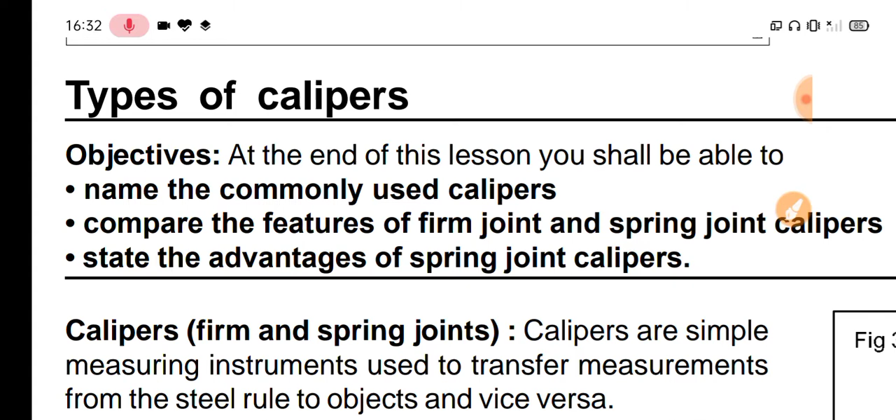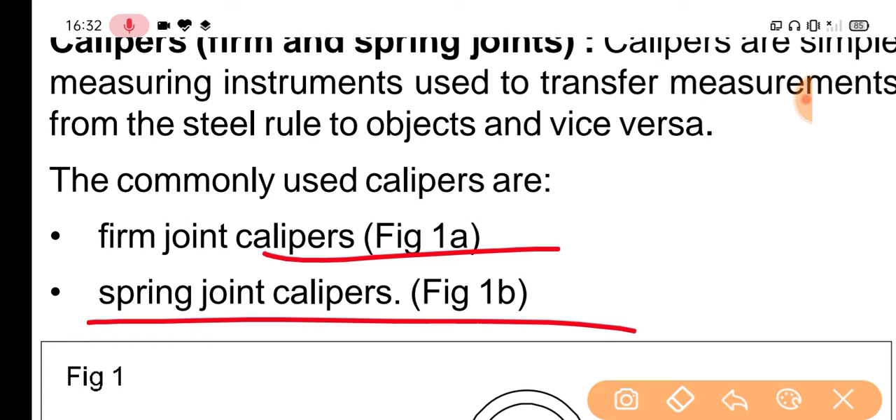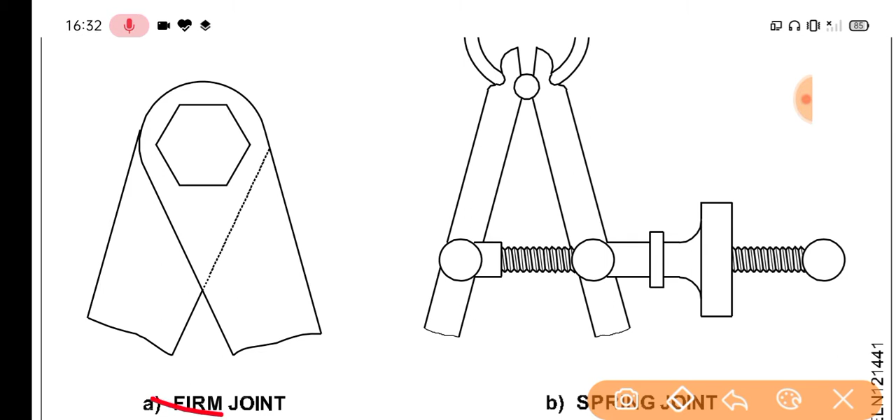Calipers, firm and spring joint. Calipers are a simple measuring instrument used to transfer measurement from the steel rule to object and vice versa. The commonly used calipers are firm joint calipers, shown in picture 1a, and spring joint calipers, shown in picture 1b. Picture 1a is a firm joint, and picture b is a spring joint.

Firm joint caliper: in the case of firm joint calipers, both legs are pivoted on one end to take measurement of the workpiece. It is opened roughly to the size, so fine setting is done by lightly tapping it on a wooden surface. Pictures 2 and 3.

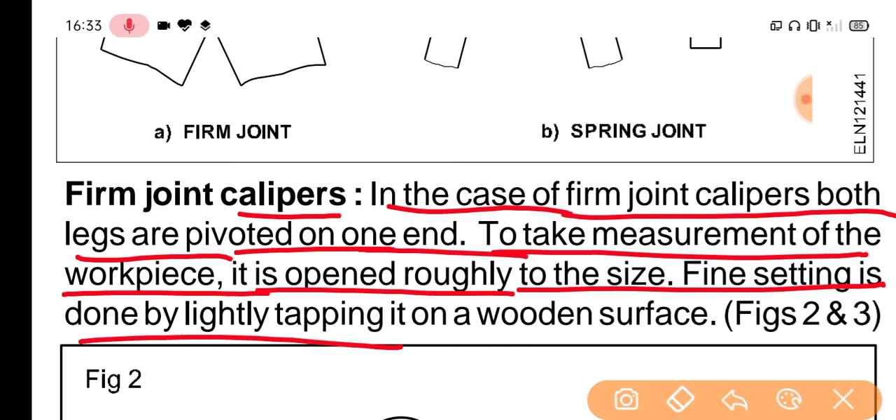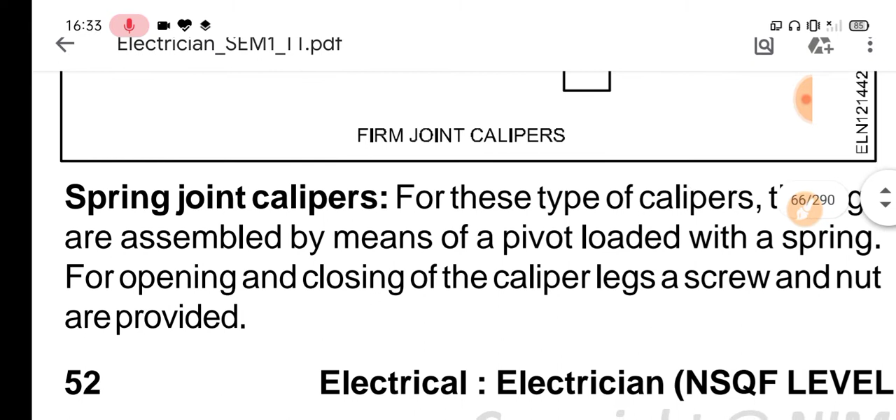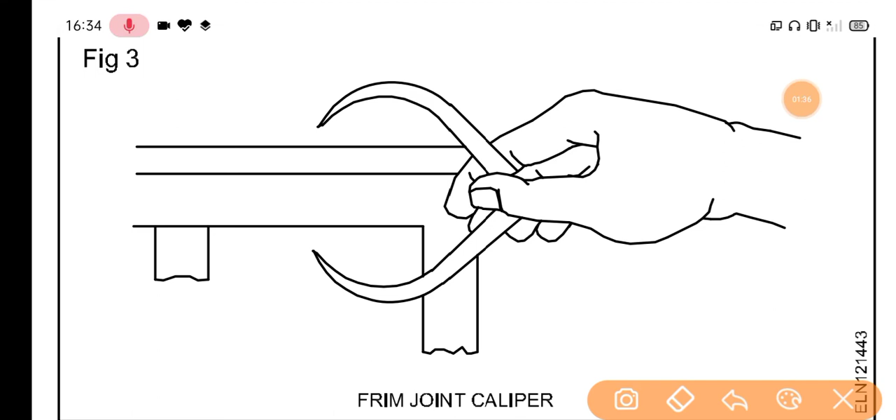Firm joint calipers, shown in this picture. Spring joint caliper: in this type, the legs are assembled by means of a pivot loaded with a spring for opening and closing the caliper legs, screw and nut are provided. Picture 3 shows the firm joint calipers, and spring calipers have the advantage of quick setting. The setting made will not change unless the nut is turned.

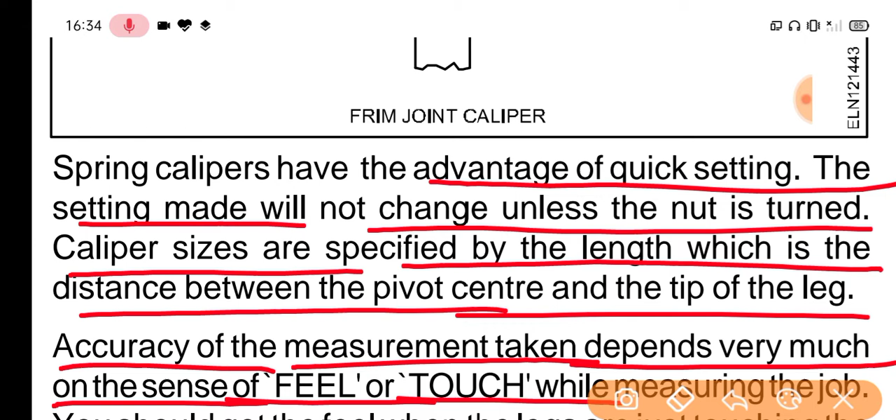Caliper size is specified by the length, which is the distance between the pivot center and the tip of the leg. Accuracy of the measurement taken depends very much on the sense of feel or touch while measuring the job. You should get the feel when the legs are just touching the surface. Calipers used for outside measurements are known as outside calipers, while calipers used for internal measurements are the inside calipers.

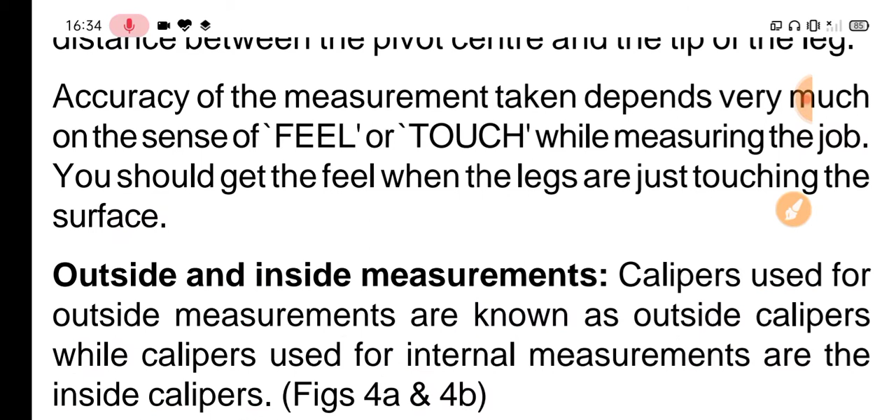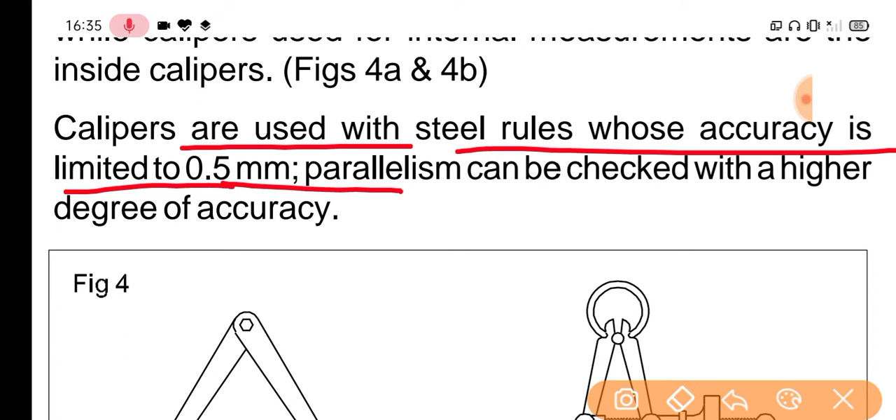Calipers are used with a steel rule whose accuracy is limited to 0.5 mm. Parallelism can be checked with a higher degree of accuracy. This is an outside caliper, this is an outside caliper, and this is an inside caliper.

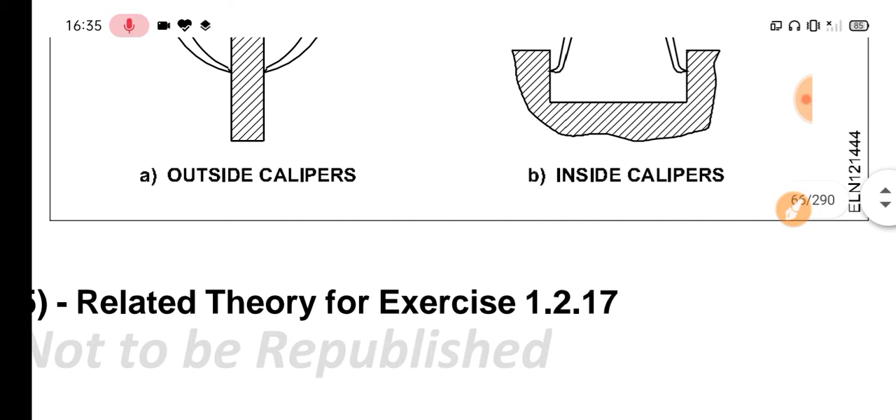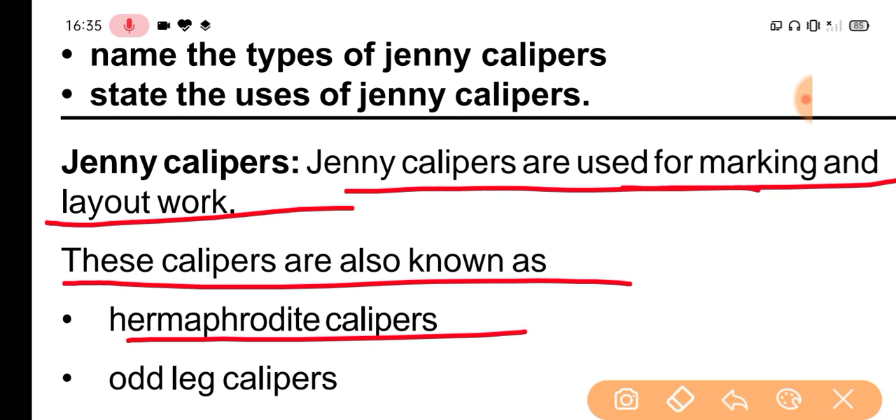Jenny calipers are used for marking and layout work. These calipers are also known as hermaphrodite calipers, odd leg calipers, and leg and joint calipers. Jenny calipers have one leg with an adjustable divider point while the other is a bent leg. The legs are joined together to make a firm joint.

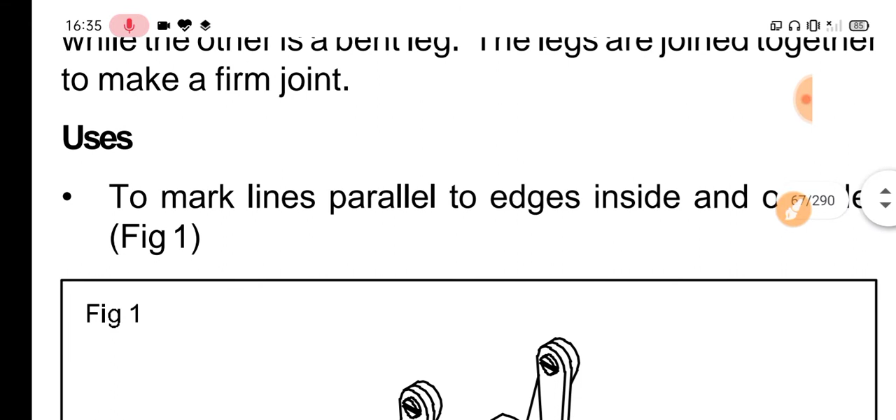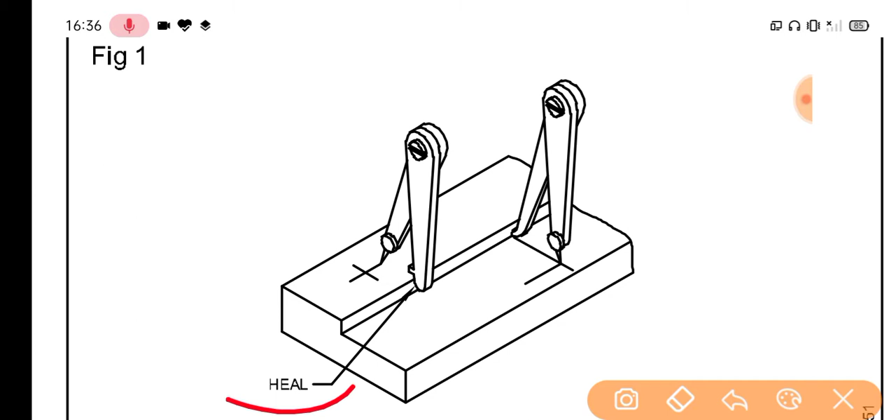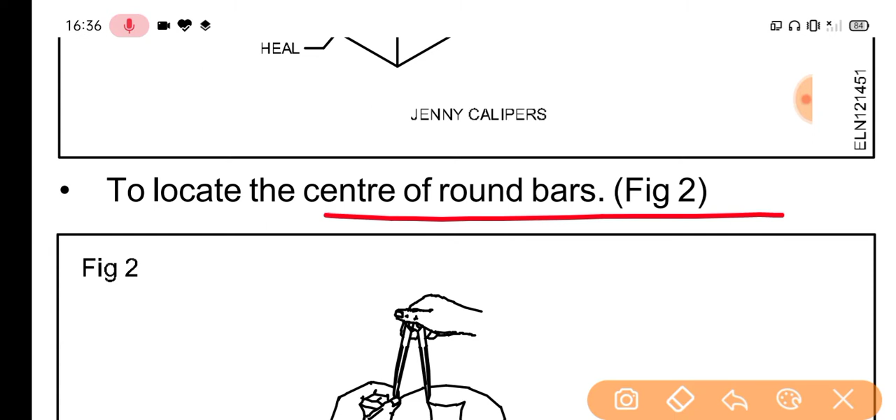Used to mark a line parallel to an edge, inside and outside, as shown in picture 1. This is the heal and Jenny caliper, this is the Jenny caliper. Used to locate the center of round bars, as shown in picture 2: locating the center of a round bar.

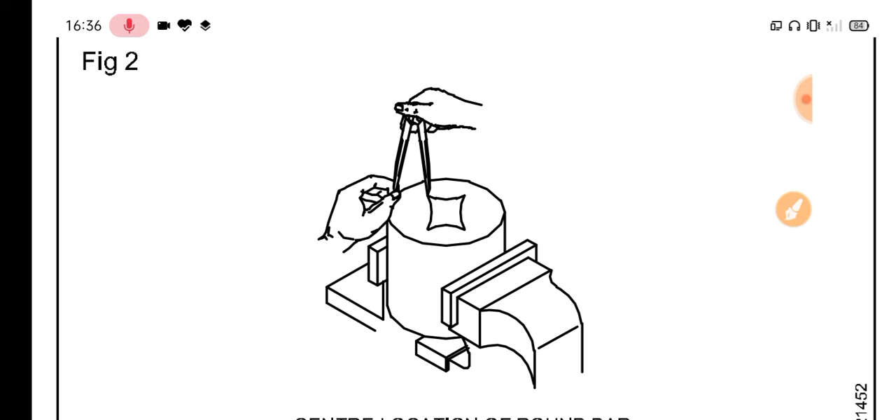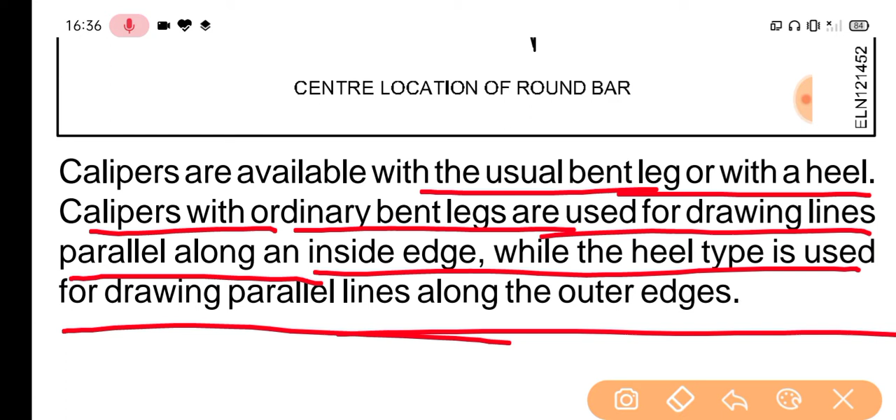Calipers are available with ordinary bent legs or with a heel. Calipers with ordinary bent legs are used for drawing lines parallel along the inside, while the heel type is used for drawing parallel lines along the outside edge.

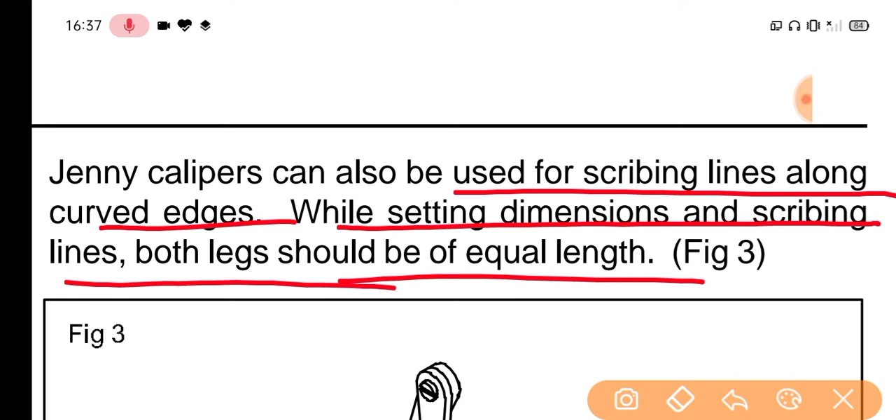Jenny calipers can also be used for scribing lines along a curved edge. While setting the dimension and scribing lines, both legs should be of equal length. Picture 3 shows this Jenny caliper.

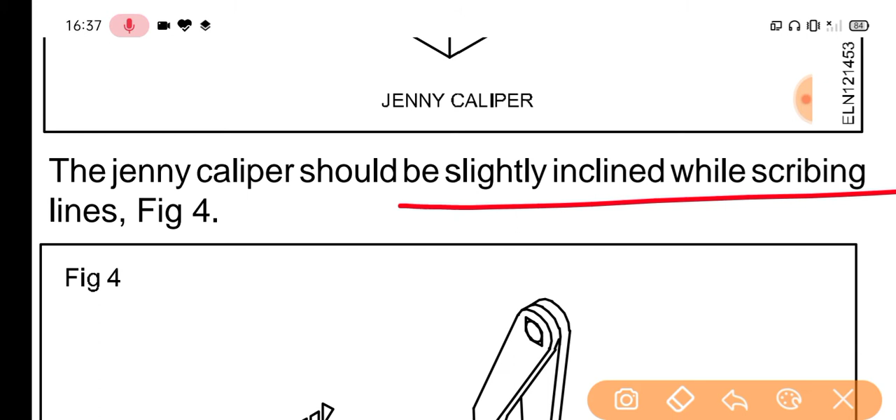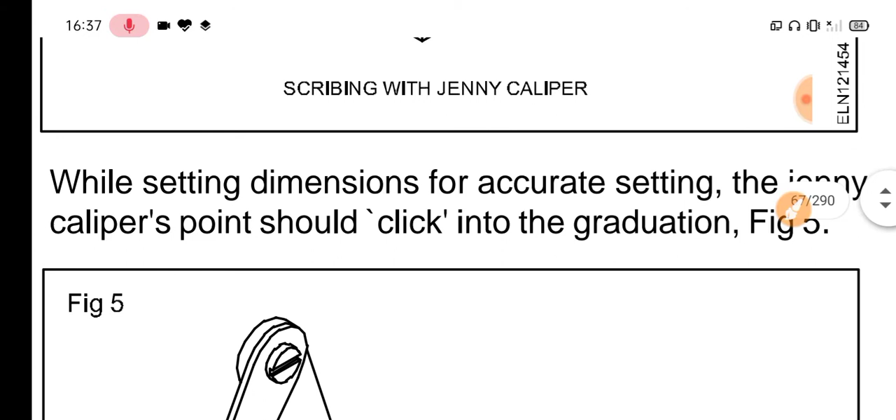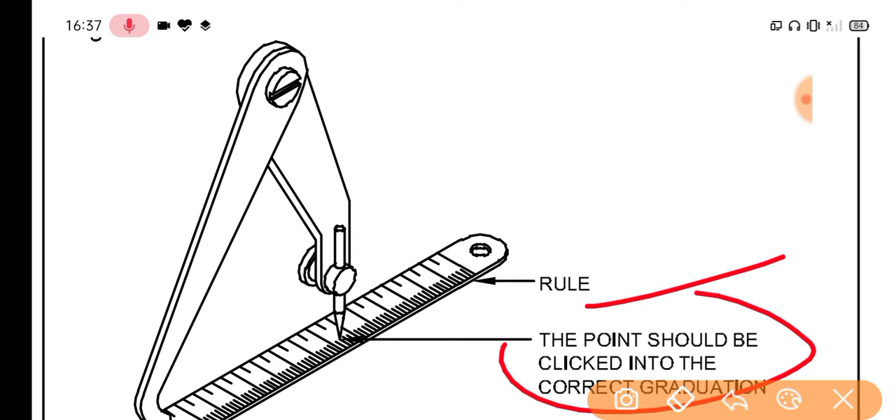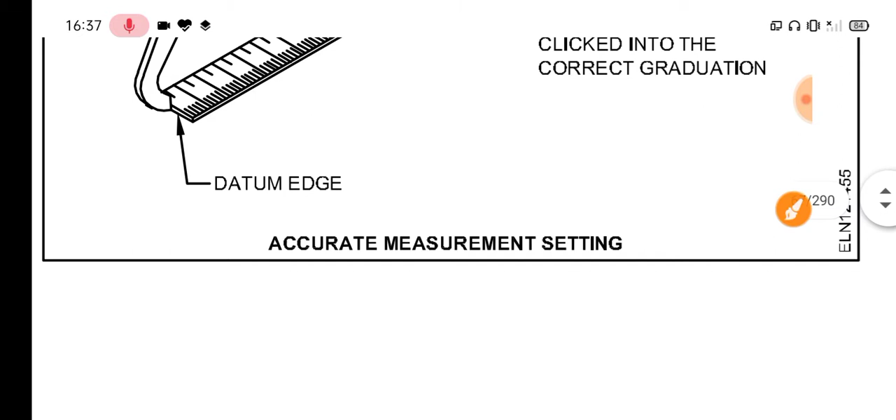The Jenny caliper should be slightly inclined while scribing lines, as shown in picture 4: scribing with Jenny calipers. While setting the dimension for accurate setting, the Jenny caliper point should click into the graduation, as shown in picture 5, and the points should click into the correct graduation. This is the datum edge, this is a datum edge. Accurate measurement setting.

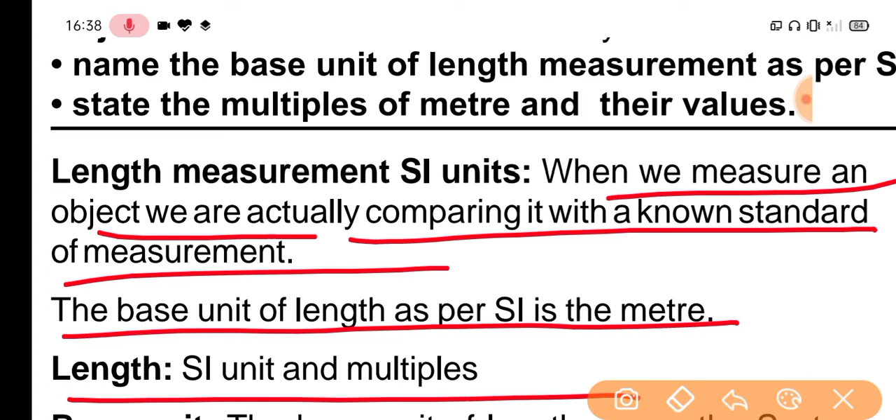Length measurements: SI units. When we measure an object, we are actually comparing it with a known standard of measurement. The base unit of length as per SI is the meter. The length SI units and multiples: the base unit of length as per the International System is the meter.

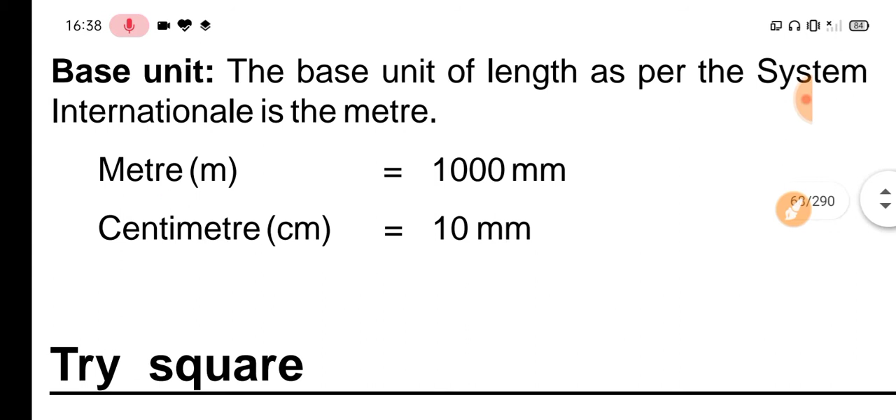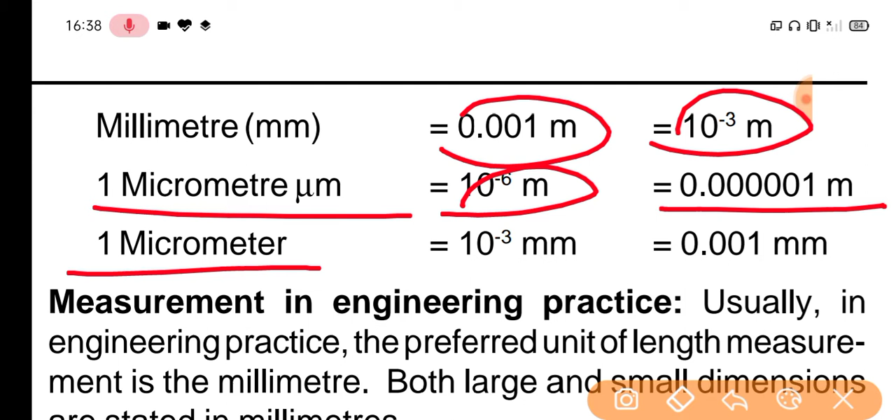The meter is 1000 mm. The centimeter is 10 mm. The millimeter is 0.001, or 10 to the minus 3, meter. 1 micrometer is 10 to the power minus 6 meter, that is 0.001 millimeter.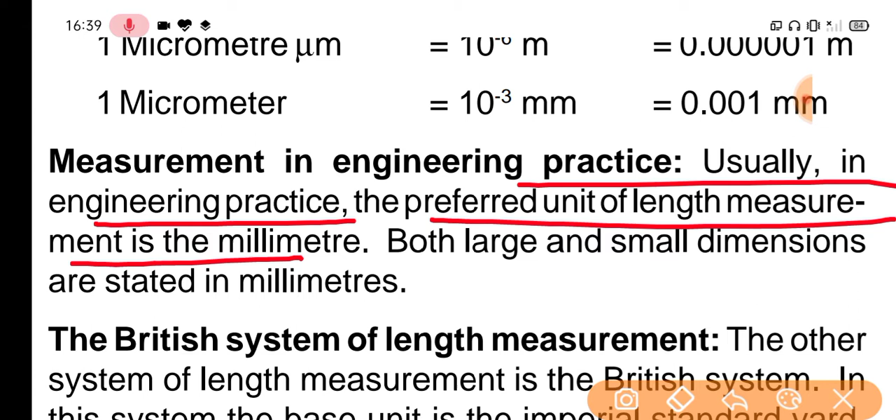Measurement in engineering practice: usually in engineering practice, the preferred unit of length measurement is the millimeter. Both large and small dimensions are stated in millimeters.

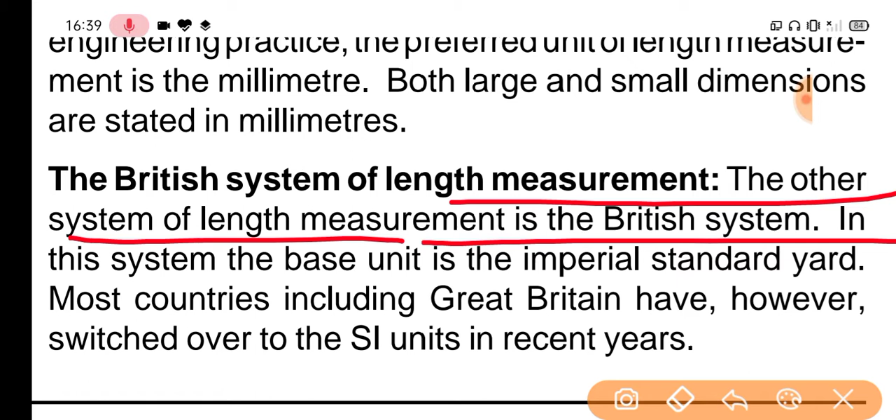British system of length measurement: the other system of length measurement is the British system. In this system, the base unit is the imperial standard yard. Most countries, including Great Britain, have however switched over to the SI unit in recent years.

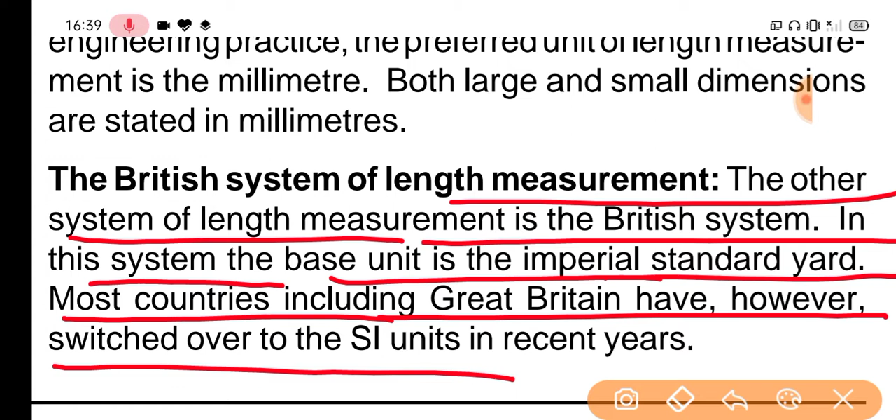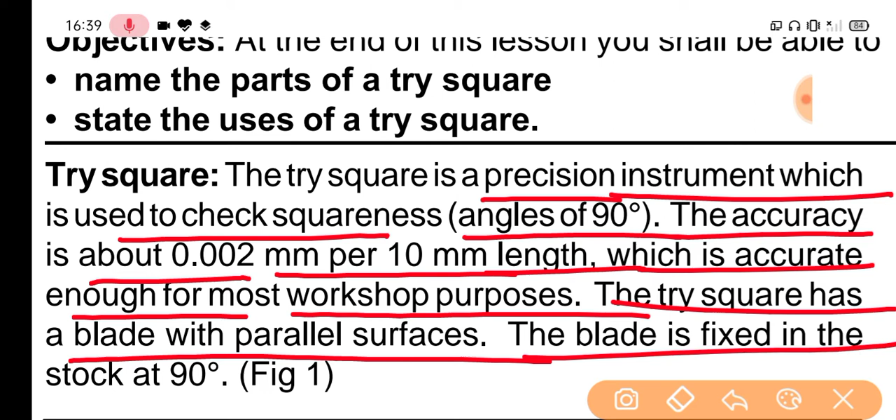The try square has a blade with parallel surfaces. The blade is fixed in the stock at 90 degrees. This is the stock, this is the 90 degree angle, and this is the blade.

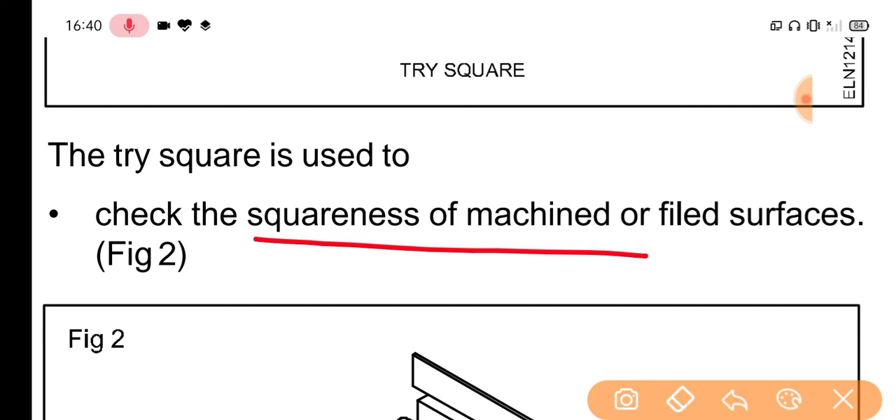This is the try square. The try square is used to check the squareness of machined or filed surfaces, as given in picture 2, checking squareness.

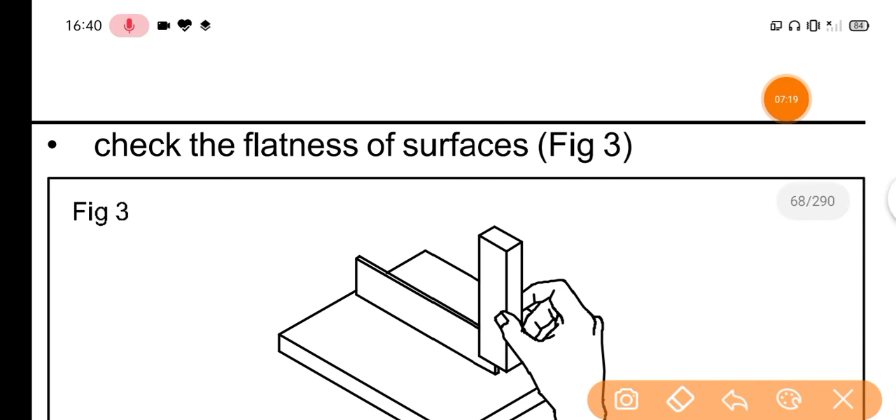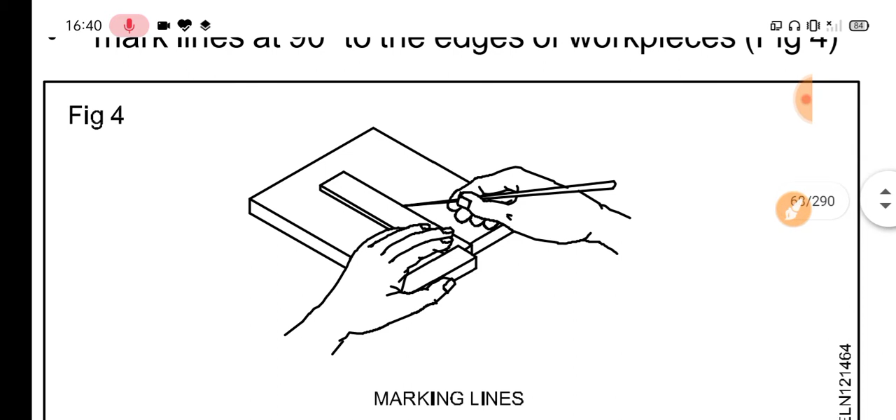Check the flatness of a surface as given in picture 3, checking flatness, and marking lines at 90 degree edges of the workpiece as given in picture, marking lines.

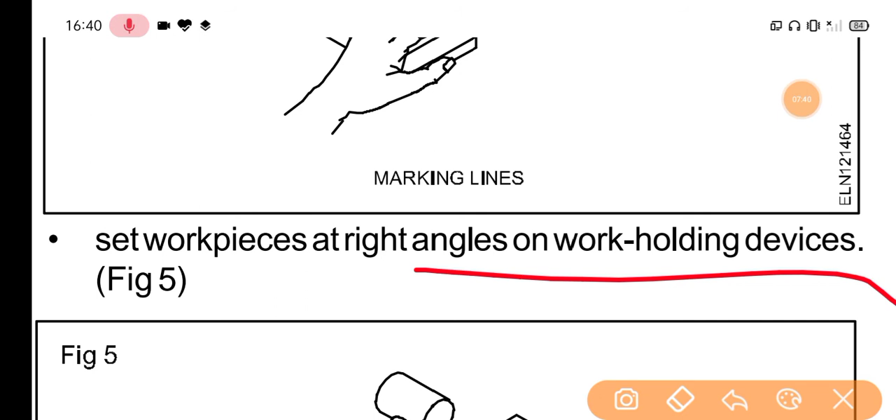Set the work at right angle on the work holding device, as given in picture 5, right angle on work holding device.

The try square is made of hardened steel. Try squares are specified according to the length of the blade: 100 mm, 150 mm, 200 mm.

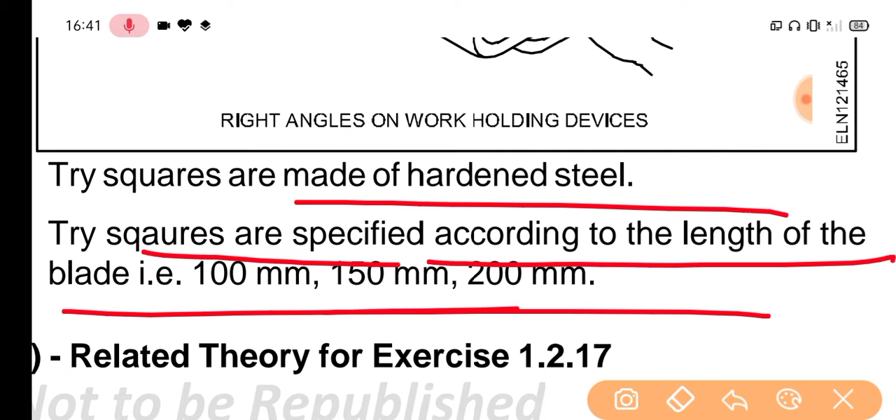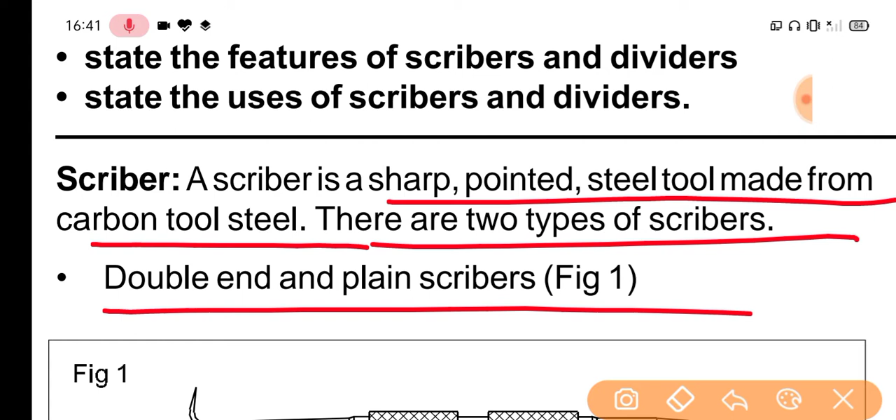Scriber and divider. The scriber is a sharp pointed steel tool made from carbon tool steel. There are two types of scriber: double end and plain scriber. This is the double end scriber, and this is the plain scriber.

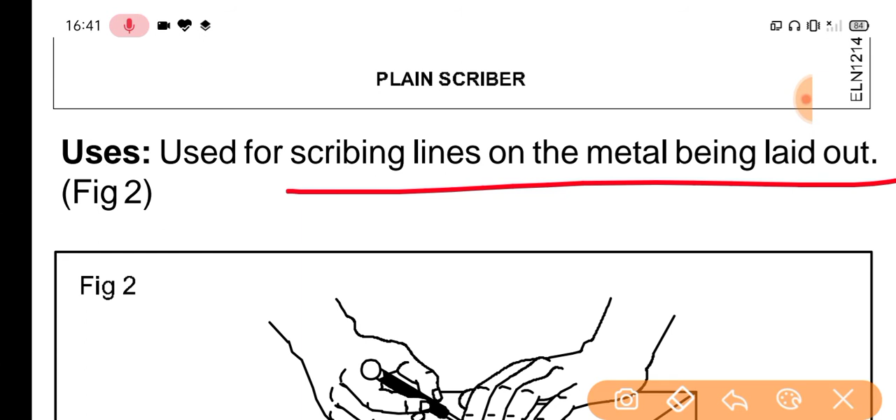Uses: used for scribing lines on the metal being laid out, as given in picture 2, scribing lines.

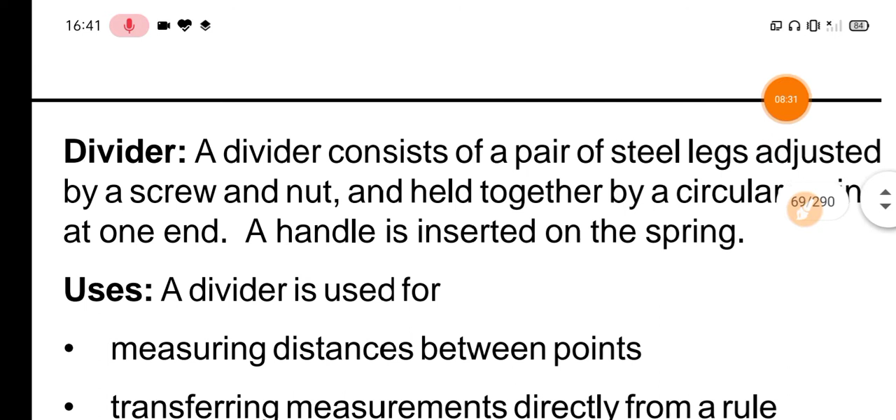The divider consists of a pair of steel legs adjusted by a screw and nut, held together by a circular spring at one end. The handle is inserted on the spring.

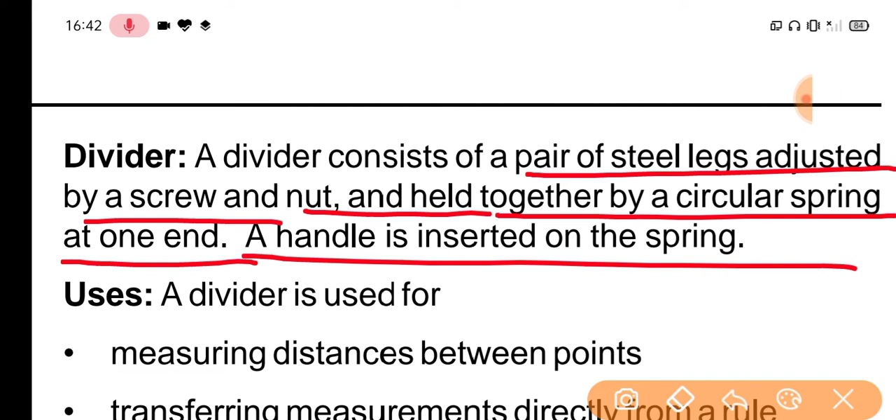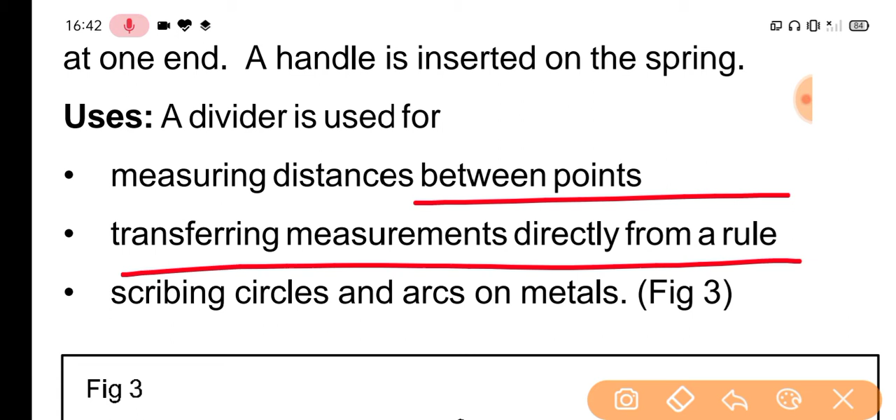Uses of divider: the divider is used for measuring the distance between points and transferring measurements directly from a rule, scribing circles and arcs on metals, as given in picture 3, scribing circles.

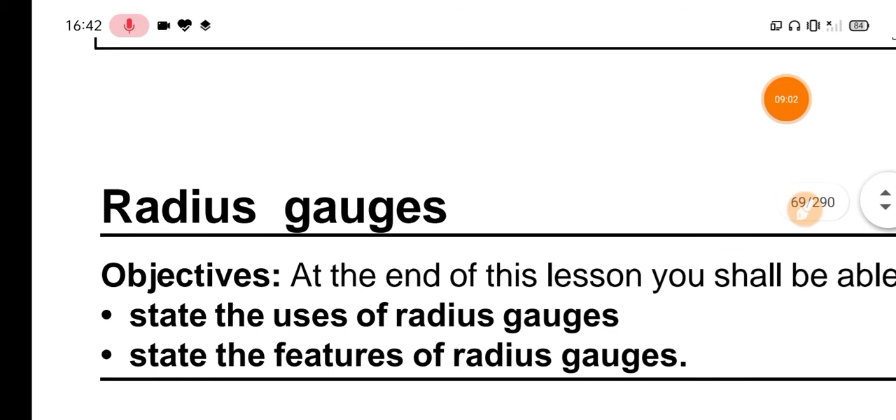Radius gauge. Gauges are used to check the internal and external radius of a workpiece.

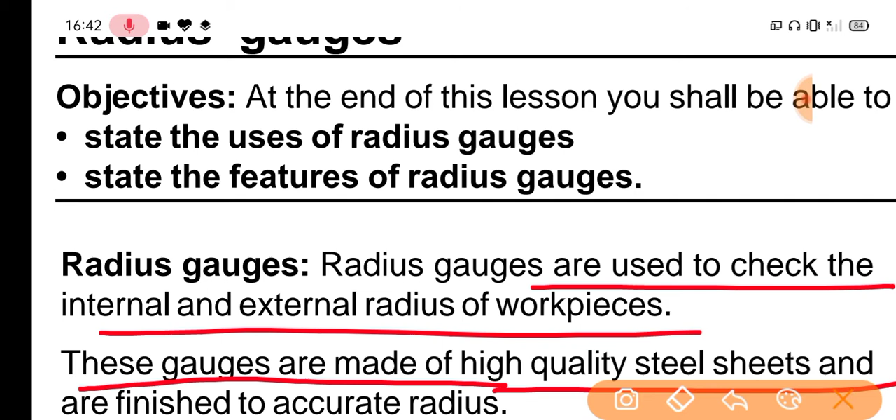These gauges are made of high quality steel sheets and finished to accurate radius. Radius gauges are used to check the internal and external radius of a workpiece, made of high quality steel sheets and finished to accurate radius.

The radius of a part is checked by comparing it to the radius of the gauge. Radius gauges are available in sets of several blades held in a holder.

Each blade can be separately pulled out of the holder when in use. The size of the radius is marked on the individual blades of the gauge.

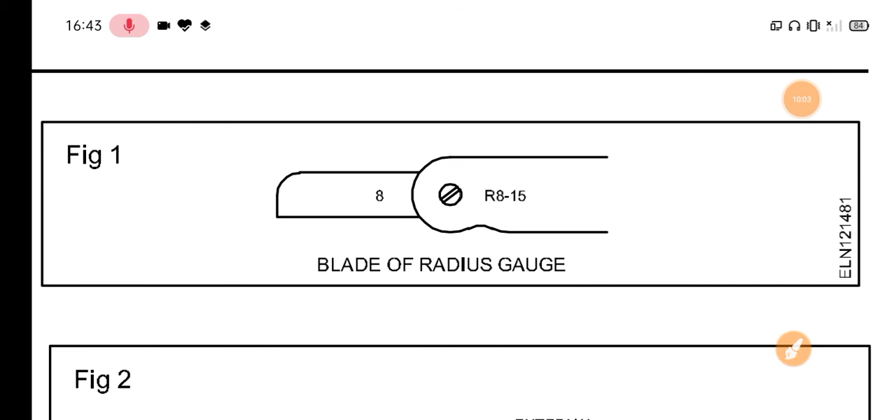This is the blade of the radius gauge, the radius blade, and this is internal and external. This is the radius gauge.

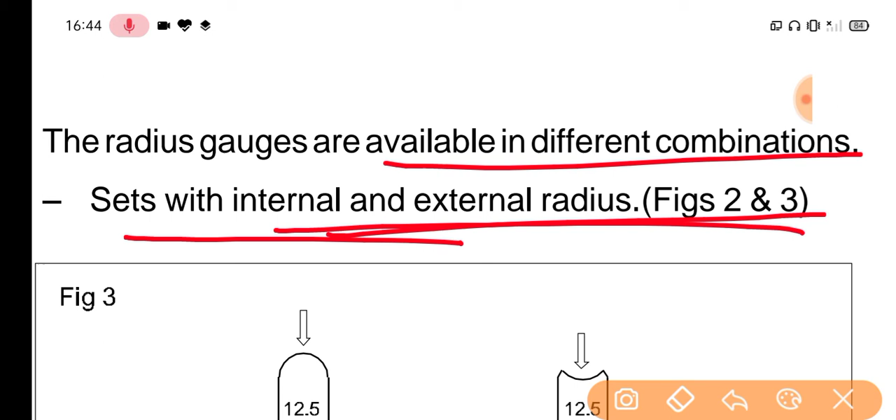Radius gauges are available in different combination sets with internal and external radius, as given in pictures 2 and 3. This is 12.5, and this is 12.5, and the radius is 7.5, say 15 mm. This is the internal radius and this is the external radius.

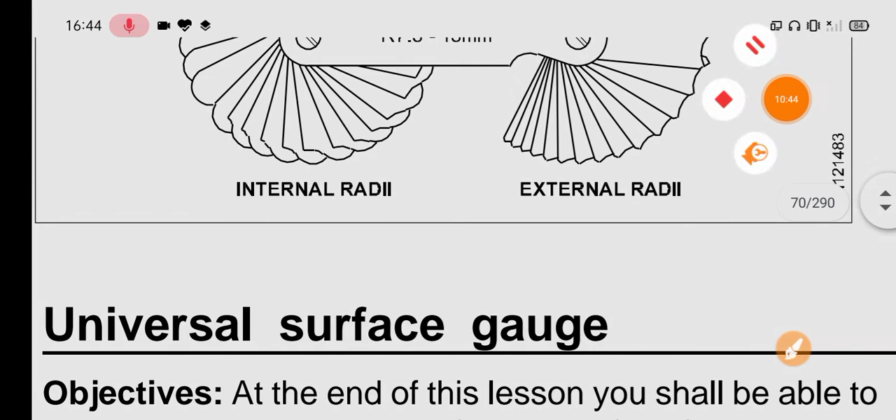Individual gauges of each radius, this is 15 mm, an individual radius gauge. Before using a radius gauge, ensure the gauge is perfectly clean.

Remove any burrs from the workpiece. Check and make sure there is no damage to the profile of the gauge.

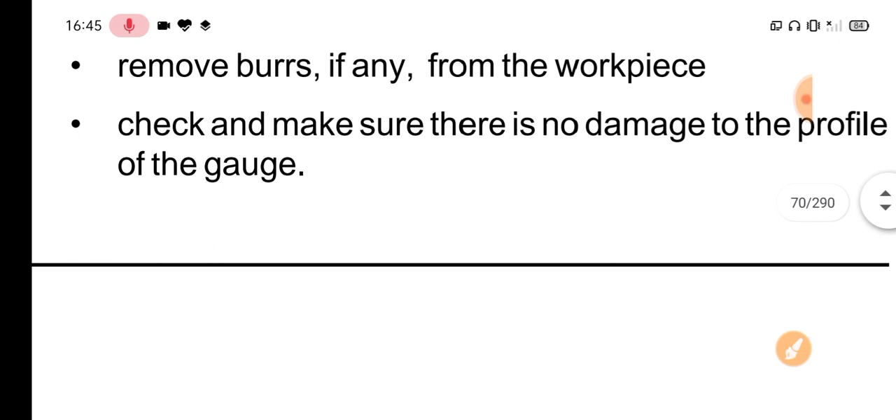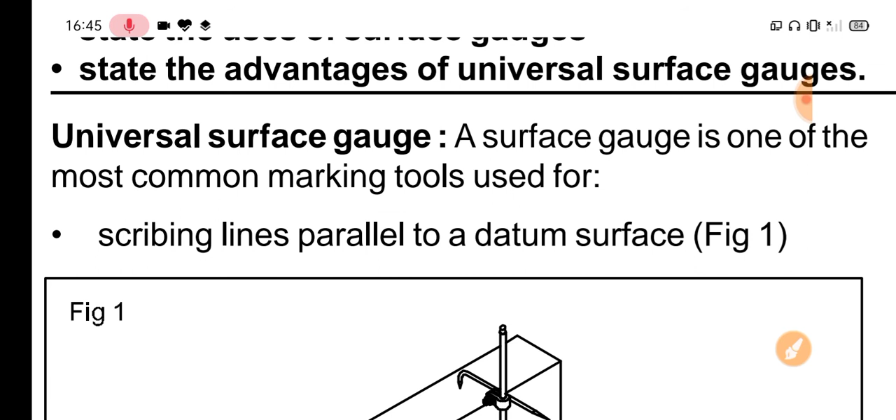Universal surface gauge. The universal surface gauge is one of the most common marking tools, used for scribing lines parallel to a datum surface, and this is the job setting on the machine.

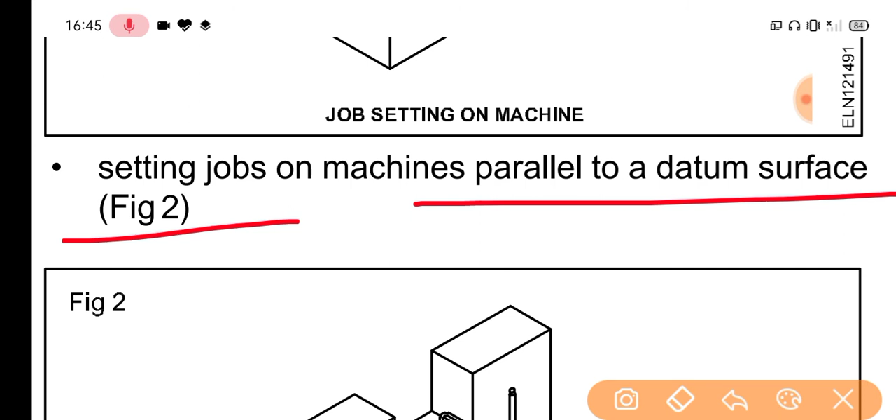Setting the job on the machine parallel to a datum surface, as given in picture 2, and this is the datum surface, as given in picture 2. Job setting on the machine.

Checking the height and parallelism of the job setting, the job concentric to the machine spindle. Types of surface gauge.

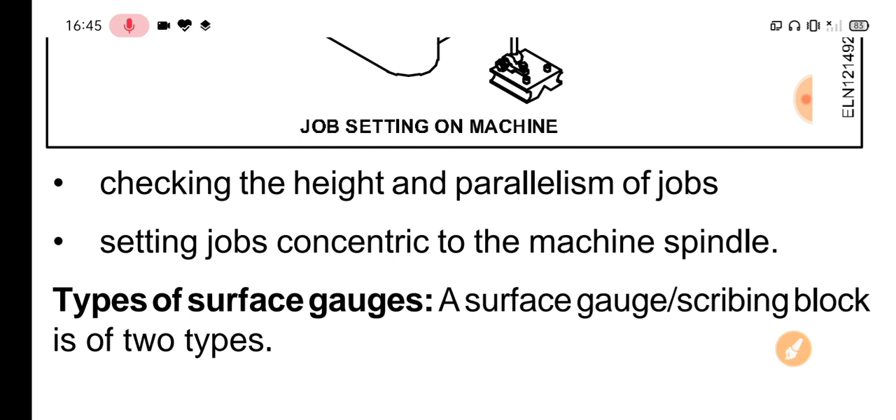A surface gauge is a scribing block of two types. Fixed surface gauge, as given in picture 3.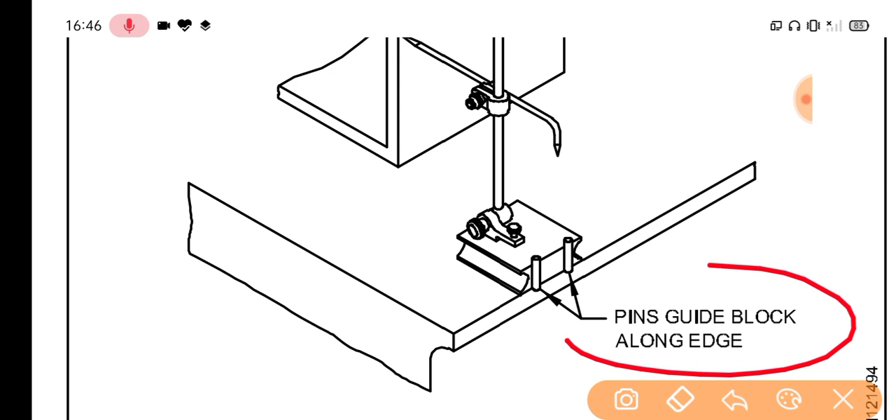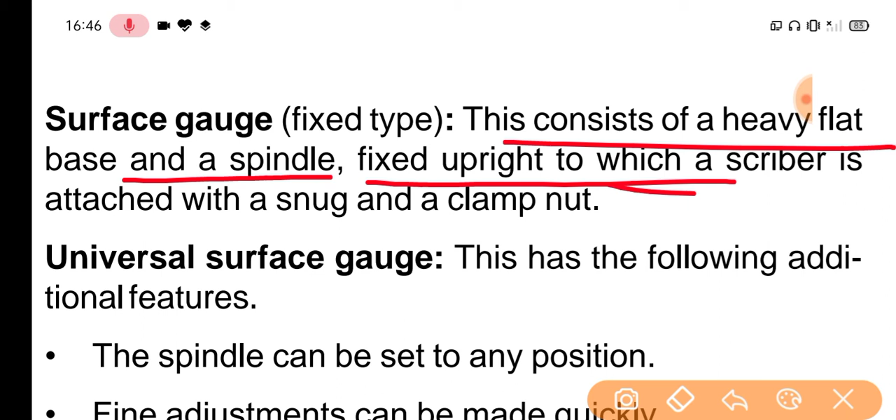Pins guide block, universal surface gauge. Surface gauge fixed type consists of a heavy flat base and a spindle fixed upright, to which a scriber is attached with a snug and a clamp nut.

Universal surface gauge. This has the following additional feature: the spindle can be set to...